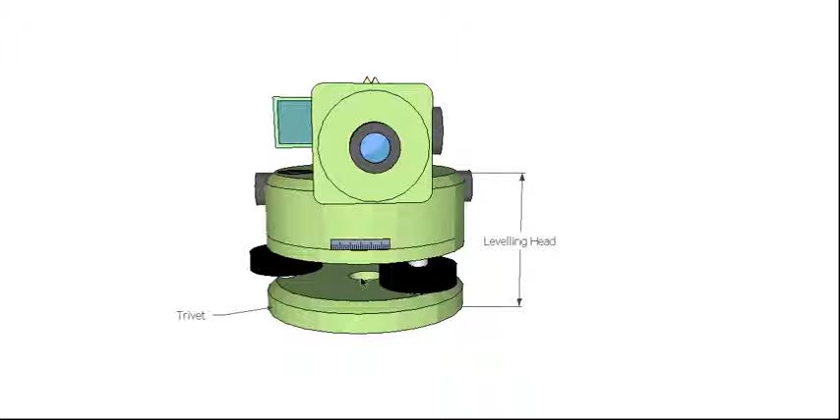So the base part is referred to as the leveling head. It's made up of about 4 different parts. So the bit at the bottom is called the trivet, and this lets us connect to the tripod via the little screw hole in the middle here. So the screw that's in the tripod screws up into the trivet and locks the automatic level onto the tripod.

We then have our foot screws, and these are the parts that level the automatic level, so we get nice accurate readings, and there's 3 of these. And then we have the tribrach. This is just the bulk of the level, which also pivots around. And you can see there's a protractor, so we can actually measure angles if we want to. So that's that part of the automatic level.

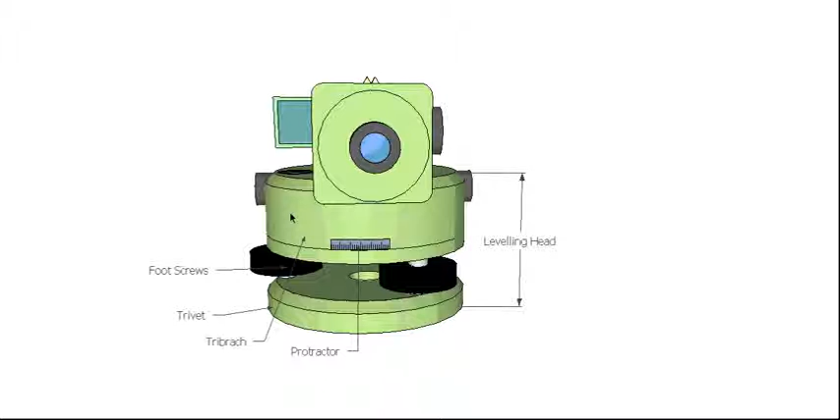We then go on to the top half. Up here we have a mirror with a little prism, which lets us see down onto our bullseye bubble, or bullseye level. So that's just like a little spirit level, which helps us get the automatic level obviously level.

Back here we have the eyepiece where we look into the instrument, and the last little ring on the end of it also has a little focus knob that helps us focus the crosshairs which are inside the level. I'll show that in a minute. So yeah, a focusing knob there, and the eyepiece.

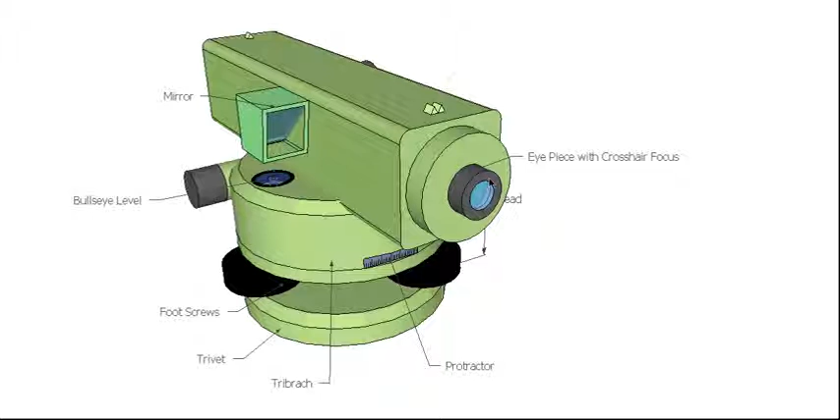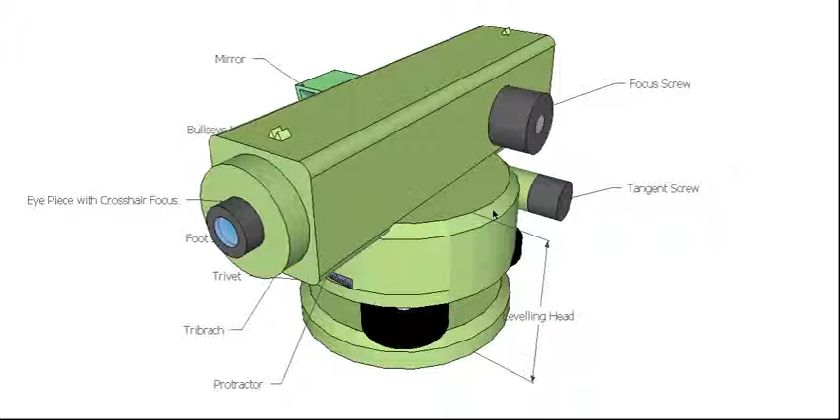Go around. We've got our main optics focus, so we can focus our image. There, the large knob. And down here we have a tangent screw. So when we move that, it slowly moves the main body or the tribrach around, so we can actually traverse small angles. On top of the instrument we have a set of open sights, so we can roughly line up with our staff or whatever we're trying to take a reading of before we look through the eyepiece.

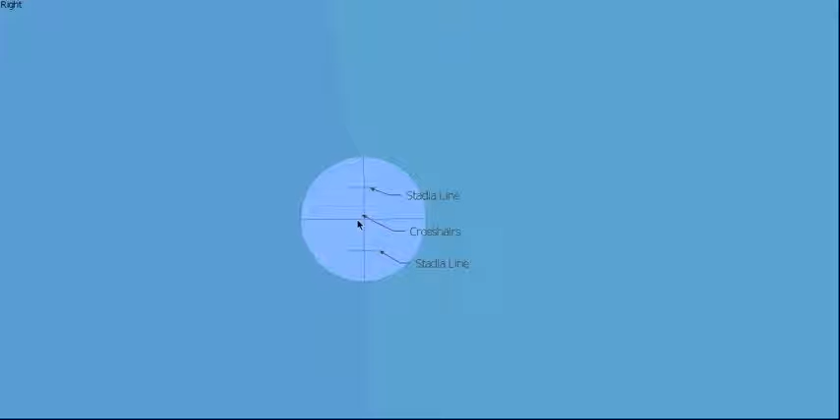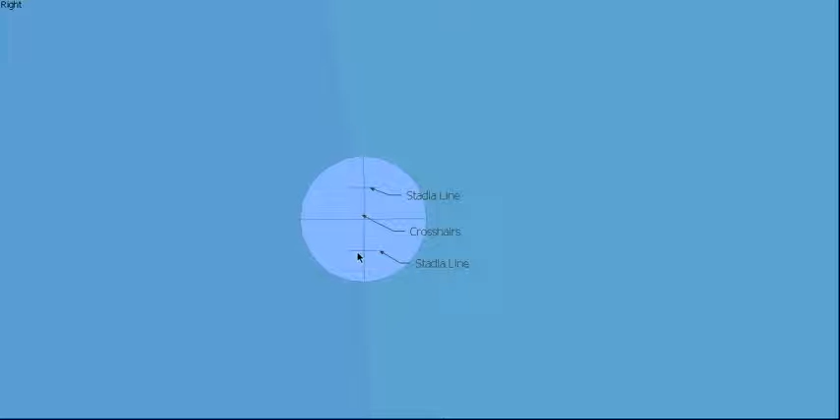When we look into the eyepiece, you're going to see a couple of things. Obviously the cross in the middle is what we refer to as our crosshairs, and this middle line is where we take our main readings from. And we also have our stadia lines, one at the top, one at the bottom, and these are used for measuring distance. So that's it. They're the parts of an automatic level.